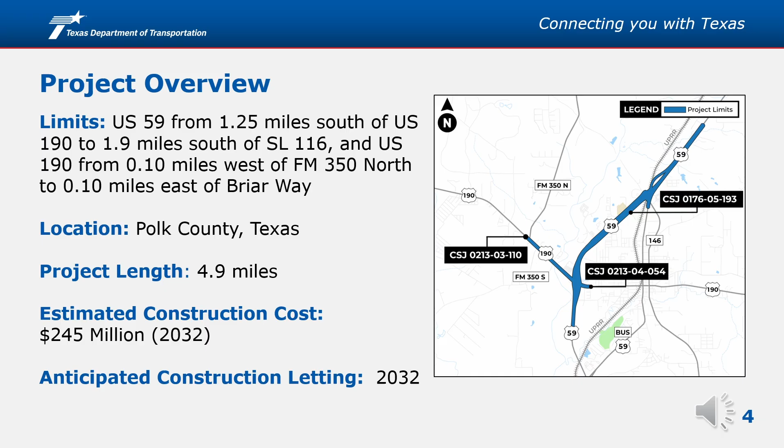The proposed project is needed because US 59 within the project limits does not meet current interstate standards and is increasingly prone to flooding, as experienced during spring of 2024. The US 59 interchanges with US 190 and Business 59 are also inadequate for current and future traffic volumes, resulting in traffic congestion, reduced mobility, and increased traffic crashes. The project's purpose is to enhance safety, improve mobility, provide a more efficient hurricane evacuation route, and system connectivity to I-69.

From 2023 to 2054, traffic volumes along US 59 are expected to increase an average of 71% in the project area. This increase over the period includes 63% growth on US 59, 78% growth on US 190, and 62% growth along Business 59. 34% of the total traffic volumes, a little more than one-third, is expected to be from trucks. The high growth rate along US 190 and Business 59 near US 59 are driving the need for improvements to those interchanges.

From 2021 to 2025, the project area experienced similar crash totals, varying between 141 and 149 crashes per year, with a notable exception of a sudden rise in 2023 to 186 crashes. This increase corresponded to a sudden traffic increase in 2023 and is thought to be connected to traffic fluctuations associated with post-pandemic traffic patterns and traffic diversion associated with construction activities on adjacent corridors during this time.

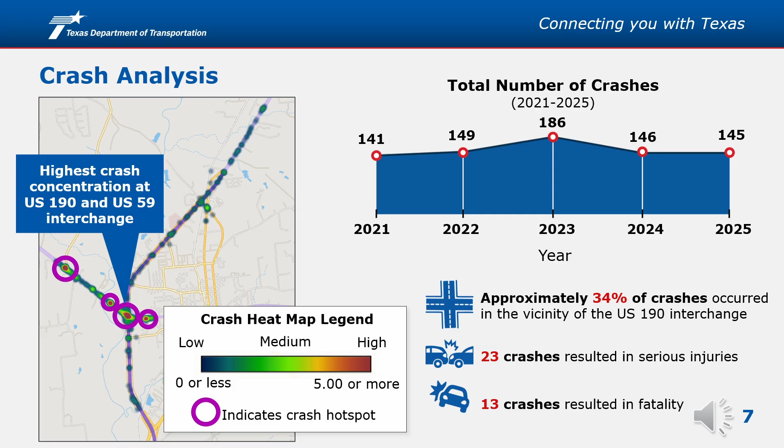Of the total crashes within the past 5 years, the highest concentration occurred at the US 190-US 59 interchange, accounting for approximately 34% of total crashes. Of the total crashes, 23 resulted in serious injury, and 13 resulted in a fatality.

The top image on the slide is showing the existing US 59 typical section. Currently, US 59 is a 4-lane median divided roadway with two 12-foot wide travel lanes in each direction, an 88-foot wide depressed median, 4-foot wide inside shoulders, and 10-foot wide outside shoulders.

The bottom image shows the proposed design to bring US 59 up to interstate standards. This design includes reconstructing the main lanes to provide four 12-foot wide travel lanes, two in each direction, a 52-foot wide barrier divided median, 6-foot wide inside shoulders, and 12-foot wide outside shoulders. The frontage roads would also be reconstructed, consisting of two 12-foot wide travel lanes with 4-foot inside shoulders, 8-foot outside shoulders, and sidewalks.

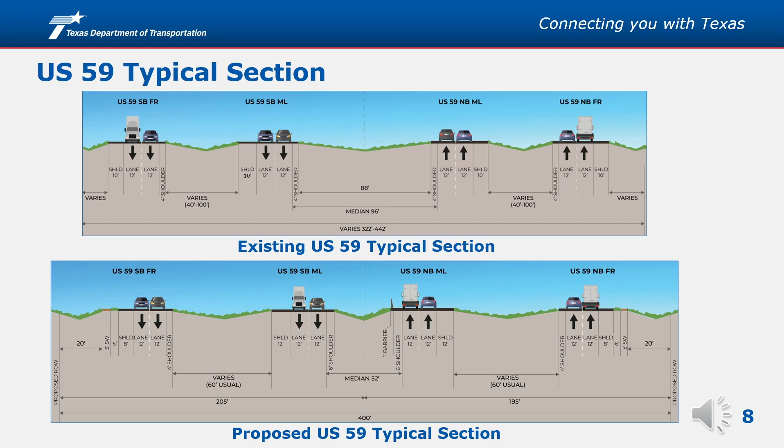This slide illustrates the typical section view of existing and proposed US 190. The top image shows the current US 190 roadway as a 4-lane divided highway with two 12-foot lanes in each direction.

It has a 24-foot median to accommodate left turns, plus 2-foot wide inside shoulders and 10 to 12-foot wide outside shoulders, which also serve to provide ingress and egress for adjacent businesses, with no pedestrian connectivity.

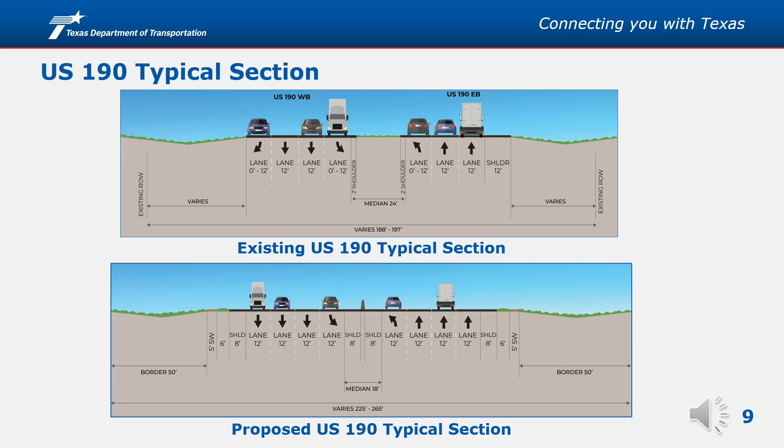The bottom image shows the proposed US 190 roadway that would provide four 12-foot lanes in each direction, with the inside lane also serving left turns at intersections, an 18-foot wide barrier-separated median, and sidewalks on each side.

The proposed project also involves improvements on US 59 interchanges at US 190 and Business 59. The US 59/US 190 interchange would be reconfigured to a diverging diamond interchange, or DDI. DDIs are becoming a preferred cost-effective solution for TxDOT to improve mobility and safety at congested freeway interchanges.

They accommodate high left turn volumes and move more traffic through interchanges by combining left and through movements. They also enhance safety by reducing conflict points from traditional interchanges by including overhead signing, pavement markings, and signalization to assist drivers through the interchange.

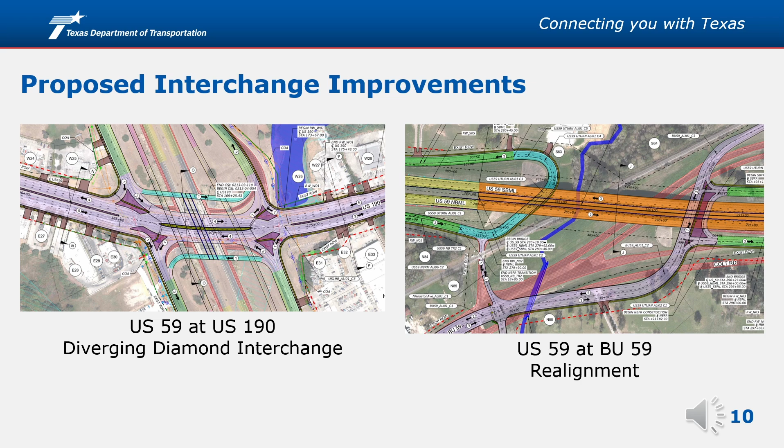The US 59/Business 59 interchange would also be reconfigured. This would involve realignment of Business 59 and constructing frontage roads to accommodate future interstate design standards and support local access. To view full detailed designs and larger maps, visit TxDOT.gov and keyword search Livingston Upgrade North.

Public meeting number 1 was held in October '24, both online and in person. Overall, the comments received were positive and in favor of the project. Part of TxDOT's analysis is to review and identify areas of concern and to determine if design changes or additional studies are needed.

The major comment themes were related to safety, congestion relief, and property access, centered on the following areas: improve north-south frontage road access across the US 190 interchange, improve US 59 ramp access to St. Luke's Hospital, improve frontage road ingress and egress to Livingston Junior High School, reduce congestion and improve safety along US 190 while still maintaining property access, and avoid impacts to Brown and Greenfield cemeteries.

The public meeting summary, which outlines meeting attendance, comments, mailing lists, meeting notifications, and more, is available online at TxDOT.gov.

Since public meeting number 1, a number of design changes have been made as a result of public input and additional data collected. The following slides provide more detail regarding how public input on each of these themes has directly impacted the project design since the first public meeting.

Several public meeting comments were received regarding the need to include direct north-south frontage road access across the US 190 interchange to accommodate adjacent businesses and direct access for Mill Ridge traffic through the northbound frontage road.

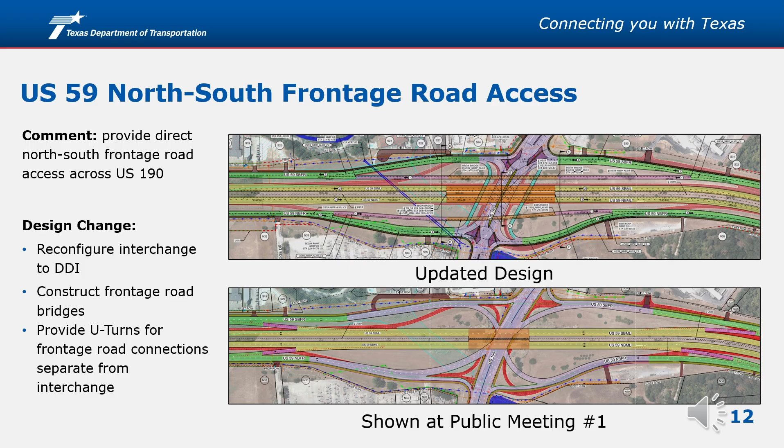The DDI also provided the opportunity to modify ramp configurations south of the intersection, allowing room for frontage road bridges that would carry frontage road traffic through the intersection. Frontage road U-turns would also be constructed separate from the interchange to improve safety and direct access to frontage roads.

Additional public meeting commenters requested improved access to St. Luke's Health Memorial Hospital, including a request for a crossover connection near the hospital.

TxDOT reviewed ramp spacing and geometric design requirements meeting interstate standards and determined that there was not sufficient spacing to provide an additional grade-separated crossover bridge near the hospital. Also, at-grade crossovers are not permitted on interstates.

TxDOT did revise the ramp configuration design to include a new ramp pair south of the improved U-turn that is expected to reduce travel times to the hospital by an average of 44 seconds.

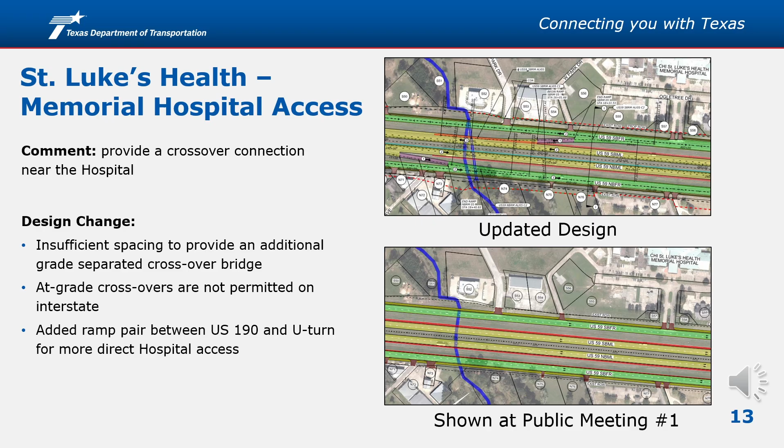There were also several commenters who expressed concern with access and safety for Livingston Junior High School traffic that would be required to take a U-turn at the new Business 59 interchange in place of the existing U-turn.

To address this concern, TxDOT revised the design to improve the existing U-turn by adding a third lane dedicated to ingress and egress for school traffic.

Additionally, TxDOT proposes maintaining the existing Business 59 North Houston access to the US 59 frontage roads using the existing at-grade UPRR crossing for traffic from Business 59, North Houston, and southbound US 59 using the improved Business 59 interchange.

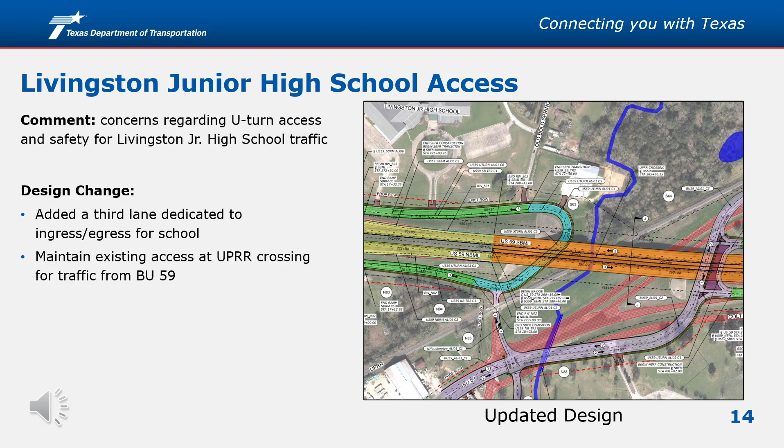The project timeline is as follows. Data collection began in 2022 and 2023 when site visits were conducted. The roadway plans were reviewed, as-built and the right-of-way abstract map were created, and utilities were located. Between 2023 and 2024, the project team developed the preliminary alternatives and environmental constraints analysis. In addition, the project team solicited input during the first public meeting in October 2024.

We're currently in the schematic design and environmental study stage. During this stage, the team will solicit additional input at this public meeting and coordinate with local agencies to work on finalizing the schematic and environmental studies. Once the schematic design and environmental studies have been completed, TxDOT will hold a public hearing, or afford an opportunity for one, to present and solicit comments on the schematic and environmental documentation. The public hearing may be held in spring 2027.

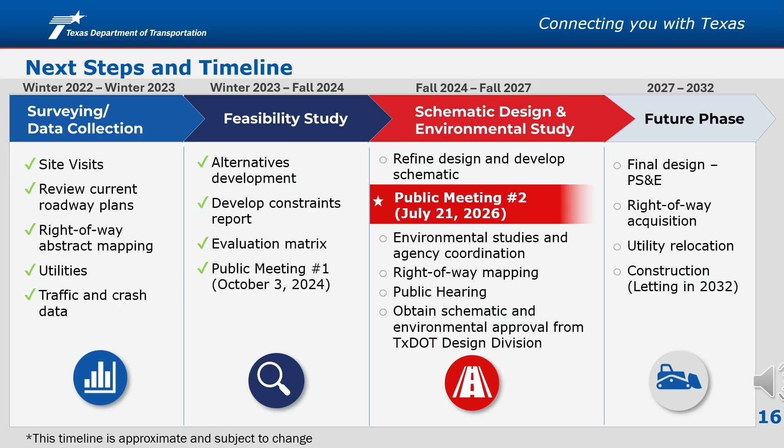Right-of-way for this project would be acquired in accordance with the Uniform Relocation Assistance and Real Properties Acquisition Policies Act of 1970 as amended. TxDOT has 3 documents which provide additional general information on the right-of-way purchasing process, including topics such as appraisal, compensation, and relocation assistance.

Copies of these documents may be found by visiting txdot.gov and searching Livingston Upgrade North, then scrolling to the Meeting Materials section on the meeting webpage.

All the materials for this public meeting are available for viewing and download on the US 59 Livingston Upgrade North Future I-69 project webpage by navigating to TxDOT.gov and searching Livingston Upgrade North. Once on the meeting webpage, scroll down to the Meeting Materials section and click on the individual documents, which include the public meeting notice, project fact sheet, schematic design, newspaper display ads, this pre-recorded presentation, and comment cards to submit comments. Another way to access the meeting materials is to visit TxDOT.gov and search Livingston Upgrade North.

Scroll down the web page and click the link for Virtual Public Meeting with In-Person option, Tuesday, July 21st, 2026. This video presentation is available in English and Spanish.